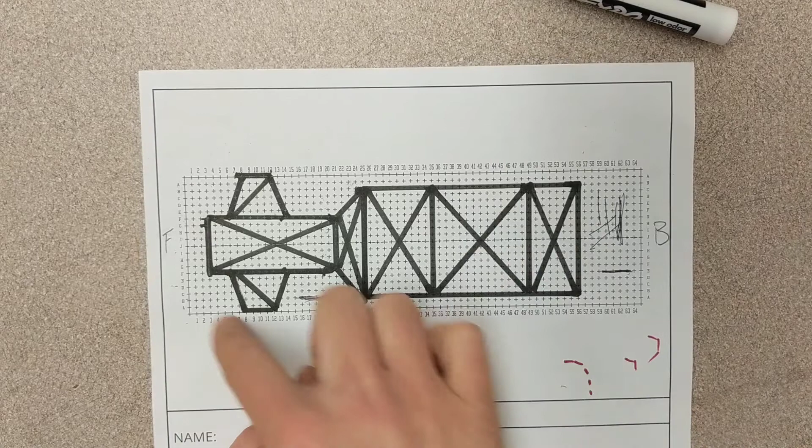What this is going to do, if you look at one I did last period, is give us a nice rough draft that we can then put into the computer so that when we laser cut it—here's one we just did on the laser cutter—you can see this is basically exactly what I had planned on my rough draft, and it's going to give us a really nice strong base for our car.

So we are building the main structural component of our vehicle. Now, before we do anything else, you need to go on the internet and do a little research on your Chromebooks about what type of car you want to build.

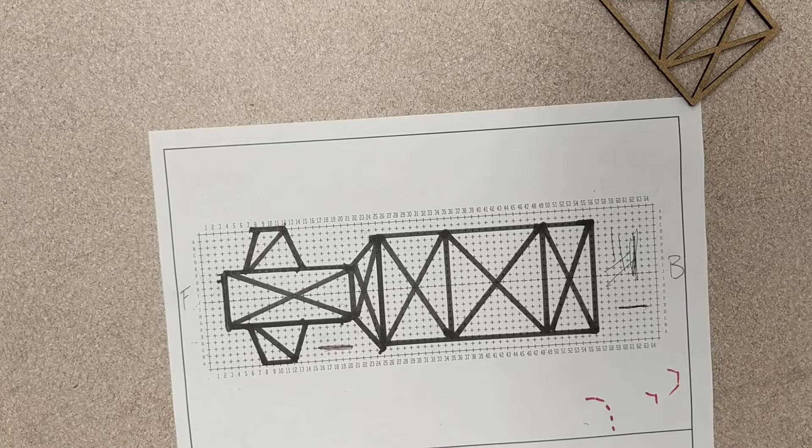It's really totally up to you, but I printed out some sample drawings so you can see the difference. Does anybody know what kind of car this is? A VW Bug, right? And here's a Scion FRS—I'm actually going to do this car because I think it's cool, and I drive it in real life. So I'm going to see if I can make a mini dragster of this car.

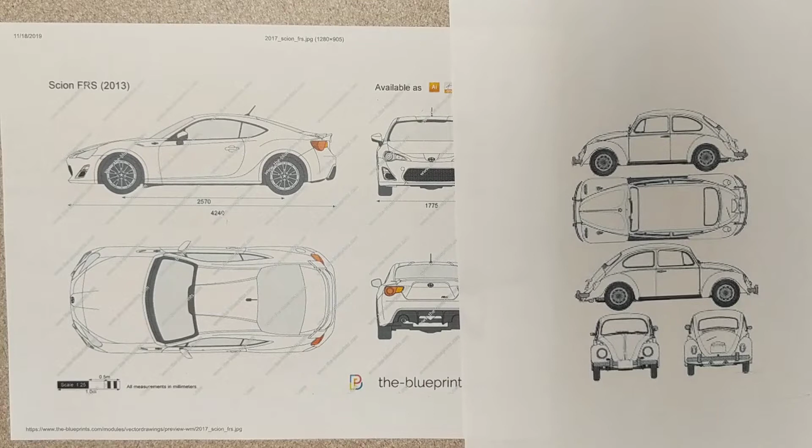But you'll see both of these cars have different shapes, right? They're both shaped differently, so the shape of your car is going to determine your chassis. On this one I might have the front angled in a little more like this, then bring it back, and angle the back in, because the chassis should fit entirely under the car.

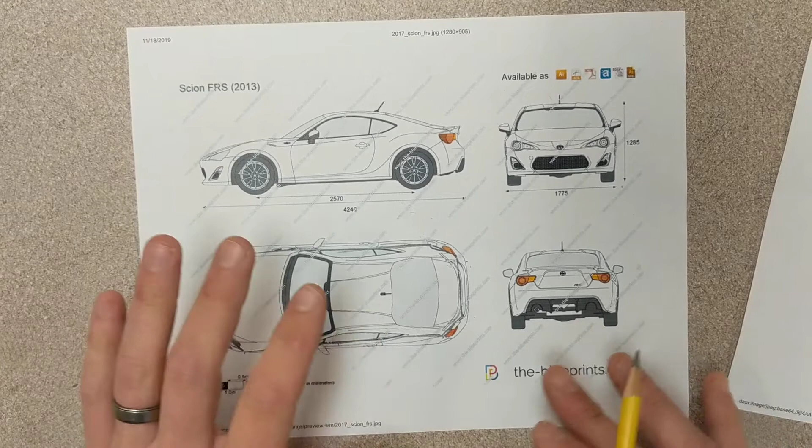On this one, I might draw my chassis out like this, then bring it over, and maybe even put a little bump out here for the front. But that's all going to have an effect on your final car. So if you design your chassis with the wrong proportions or the wrong size, it'd be really hard to make the body fit on that chassis, because they're not the same proportions, they're not the same size.

So you need to do some research and think about what type of car you want to build. Now, on our design sheet, we are going to get this design sheet.

If you look at this sheet, there are numbers across the top and numbers across the bottom. It goes from A to I this way, A to I from the bottom, and then there's a solid line right down the middle. We are going to design on this and basically play connect the dots to make our chassis.

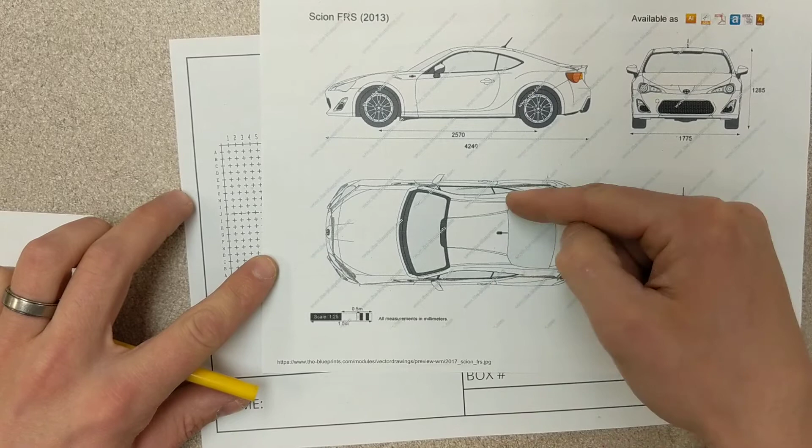Now, this line down the middle—if you remember back to bridges, how we wanted our bridges to be symmetrical—on a car, the passenger side and the driver's side are symmetrical too. So we want our car to be symmetrical this way, and we can use this whole sheet to make our car symmetrical.

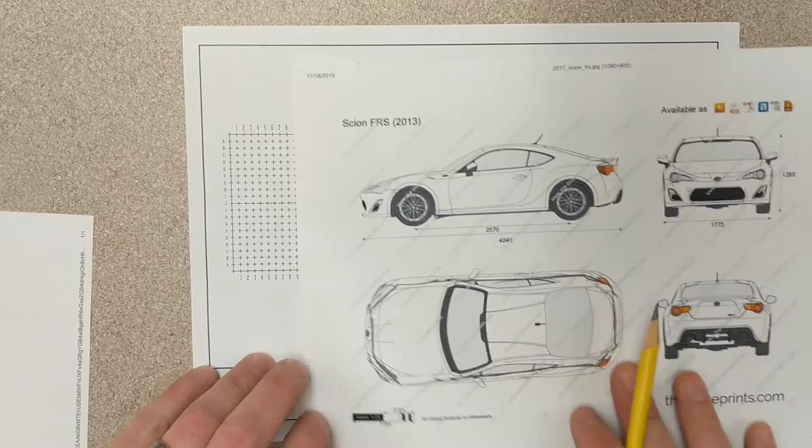So what I'm going to do is keep this off to the side, and maybe even cut it out so I can keep it on camera here. I am going to start by just doing the outside border of my chassis. I'll start just with that.

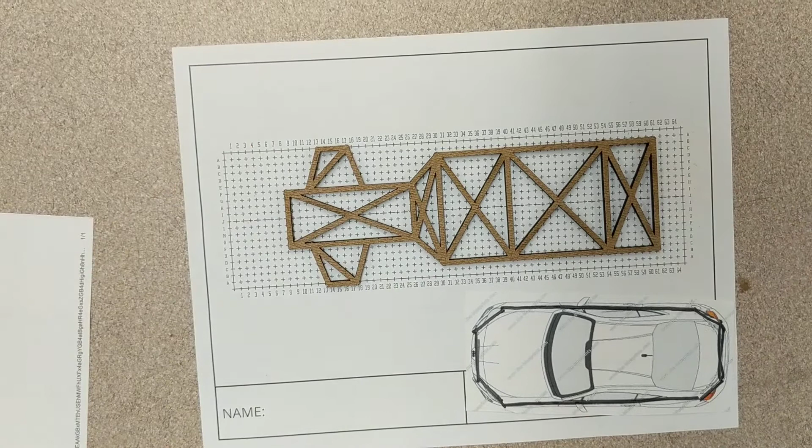Now, this size is the maximum size your chassis can be—that is the maximum. It can be smaller than that, it can be any shape, it doesn't have to be a rectangle. It could be triangular, a skinny rectangle, a long rectangle, or a short and fat rectangle—that's totally up to you, and it's going to depend on what kind of car you pick. But it has to be symmetrical, and it has to stay inside of that boundary.

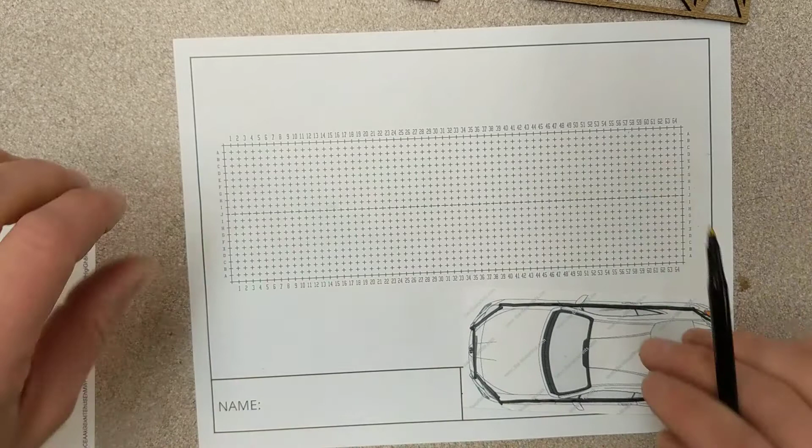So I'm just going to start, and you're going to do this part in pencil. I'm just going to start by drawing this front support right here. This is going to be the front of my car, and this is the back of my car. I'm going to draw using a ruler.

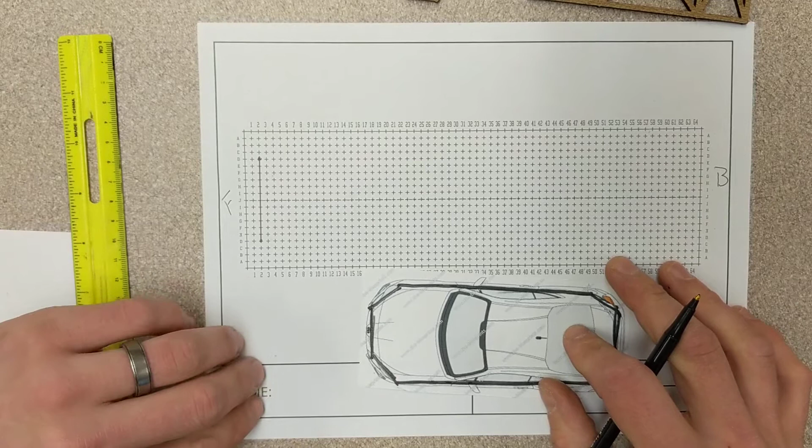I think I'm going to start on 2D, and go to 2D on this side, and then just draw in this line with a pencil—I'm just playing connect the dots. Then we have this angle that comes back, so I think I'm going to angle it back to about here, because I don't want it to be the full width—I'm going to make it a little skinnier.

So I'm going to do this, right? So now that was 4A, so then I can go down here to 4A and make a dot there.

And we're making this thing, see how that's keeping everything perfectly symmetrical? So then this is actually just kind of a straight line back. So now I'm going to kind of try to figure out about how long I want my car to be. I'm going to go to maybe like about here to 41.

So A41, and I'm going to connect this like this, and then I'm going to come down to the bottom, A41. I'm going to connect this like this. All right, so now we kind of have that shape.

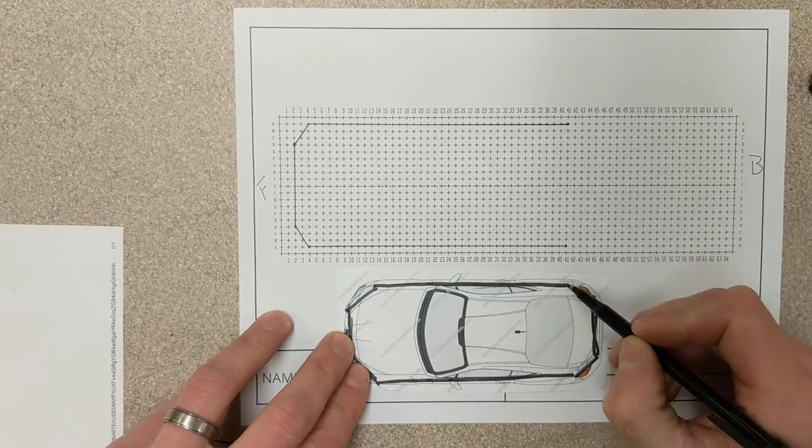I like that. And then I'm going to do an angle back like this so that I could squeeze this under my back bumper. Because when I start rounding my body off and shaping my foam body, you don't want the chassis sticking out underneath it. When you look at a real car, you don't see the chassis sticking out of the real car, right? Or on our truck, when you look at our truck, you don't see the chassis sticking out. It's all underneath. So I'm going to make this go back like this, and that is D44. Then I'm going to go to D, which is this line here, 44.

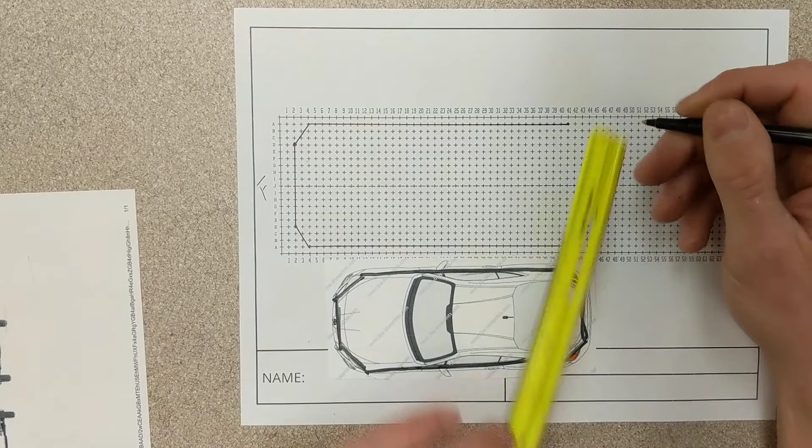It's okay. It's not great. I think this line should be kind of back a little more like that. But we're going to go with it and see what happens. We'll just rock and roll with it and see how it goes.

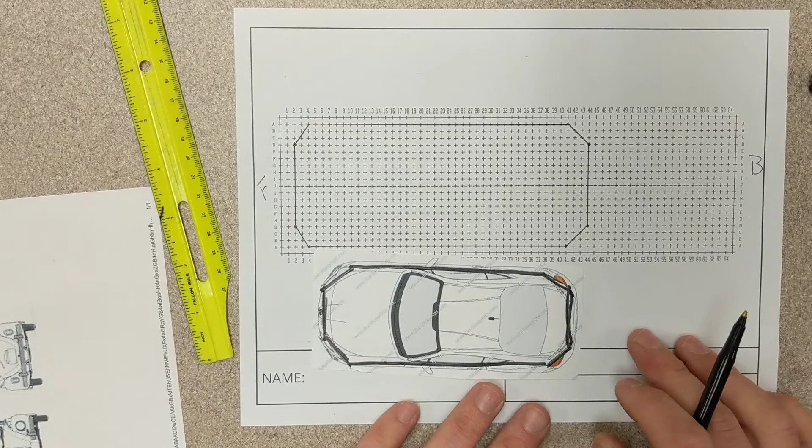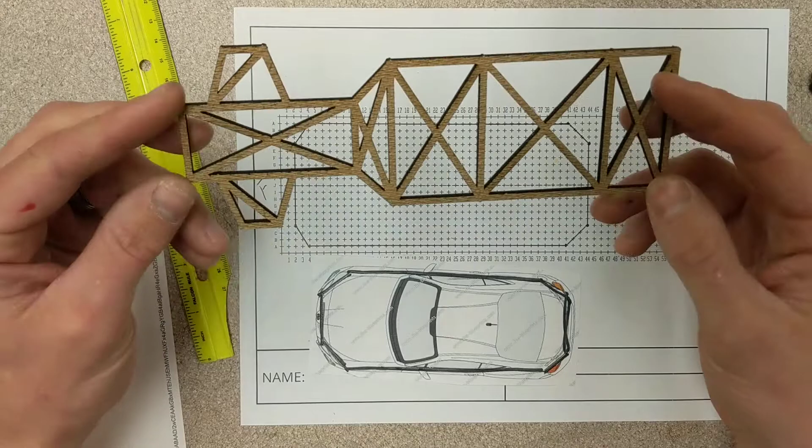Now, if I just cut out a rectangle like that, that's not going to be a very strong chassis. If you look at this chassis, there's all kinds of supports in it. If I just had the outside rectangle, that thing's going to twist and bend, and it's not going to be strong at all. So we'll go back, and then we'll just add in some supports.

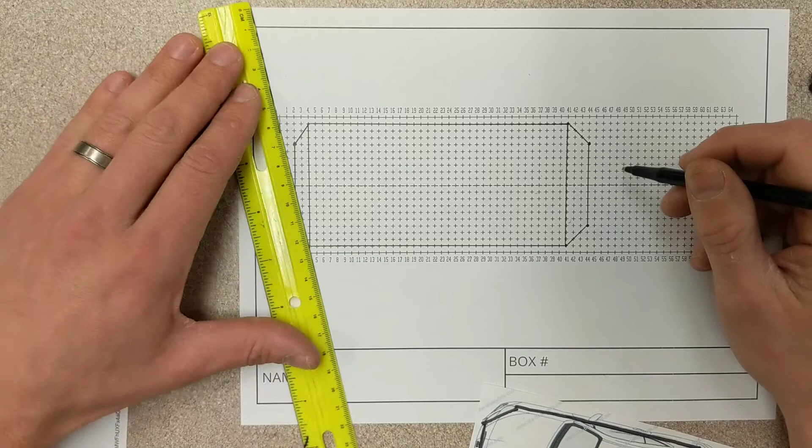So maybe I'll support this back bumper section. And the front bumper section. And if you remember back to bridges, quadrilaterals are weak shapes. We want to make triangles as many times as we can.

So I had a quadrilateral. I can split that up into that one quadrilateral, split into 3 triangles, so that's going to be a lot stronger. And you notice I put the center right on this line of symmetry. I'm going to do the same thing back here.

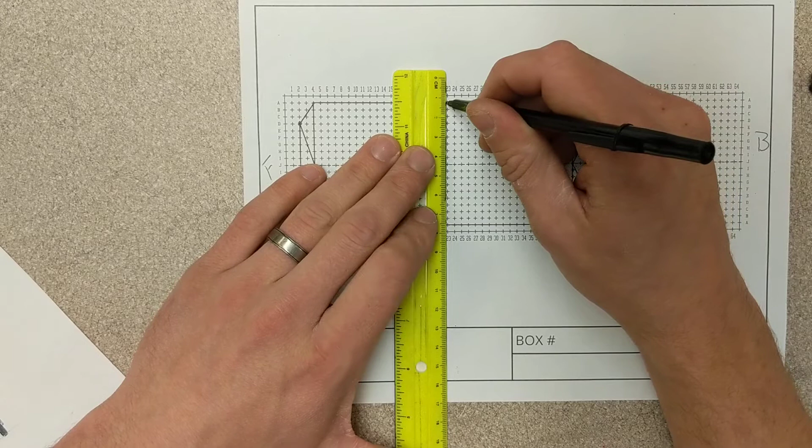All right, that looks good. And I'm just going to go simple. I'm going to go kind of near the middle, and I'm just going to draw 2 X's like this.

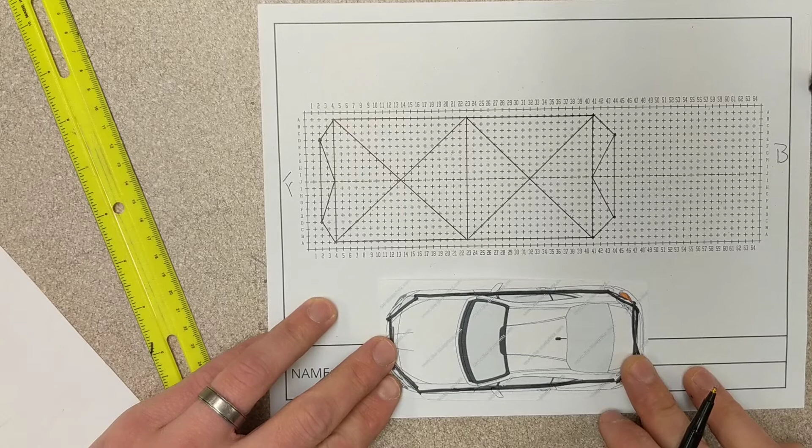All right, and I think that is the shape I'm going to go with for my chassis. Now, the last thing you're going to do is once you are happy with your shape in pencil, because obviously the pencil line is much thinner than the actual line of the wood, right?

Once you're happy with your shape in pencil, we are going to give you a marker, and you're going to go back over it in a black marker, and it's important that it's black, all right? It's very important that it's black because we're going to mark some other things on here with some different colors.

So you're just going to go back over it, and it's just going to make the lines a little bit thicker and give you a better idea of how your chassis is going to look when we actually cut it out. So you can see this Sharpie line. This slightly worn Sharpie gives you a little fatter line.

And you can see that gives us a more accurate idea. So if you do this, let's say I do this, and I look at it, and I'm like, oh man, that is like a lot of room, a lot of space between some of those supports.

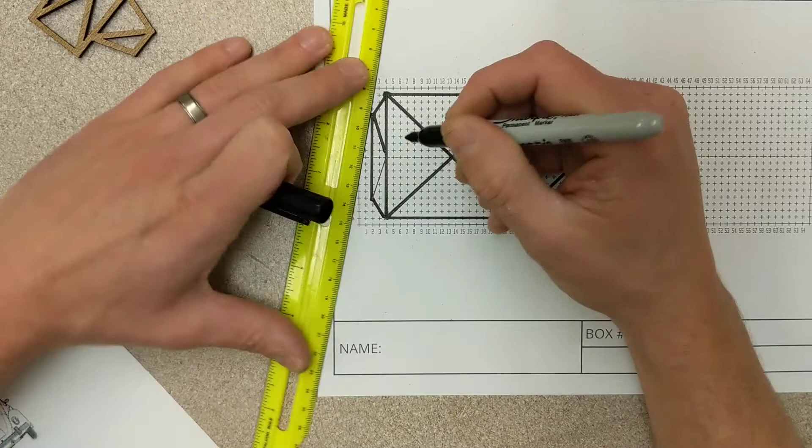Okay, at this step, before we start designing it on the computer and cutting it out, once you do this, maybe you'll see an area and you'll go, man, I really want to put some extra support in there. Okay, like there's a lot of room in there that's not supported. So maybe at that point, you go back and you go, oh, okay, I want to...

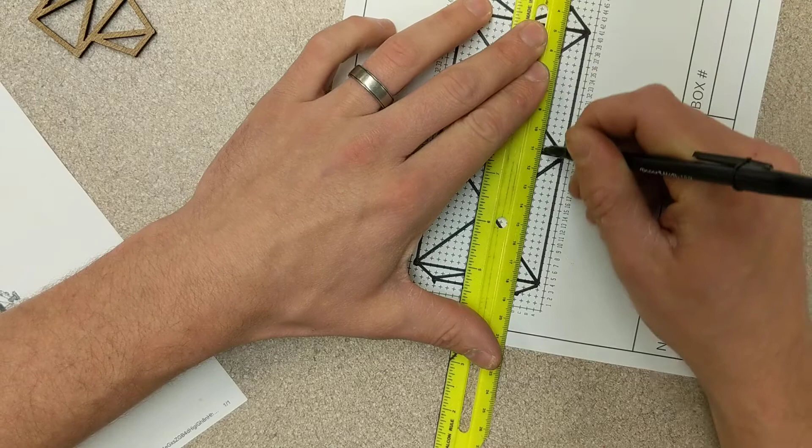put a support in like this, and then that is on D, so go up here to D. I want to put a support in like that, and then maybe just make this whole thing a little more rigid, make it a little more sturdy. Okay, that's the point of doing a rough draft, so that you can go back and change it around before you move through in the process.

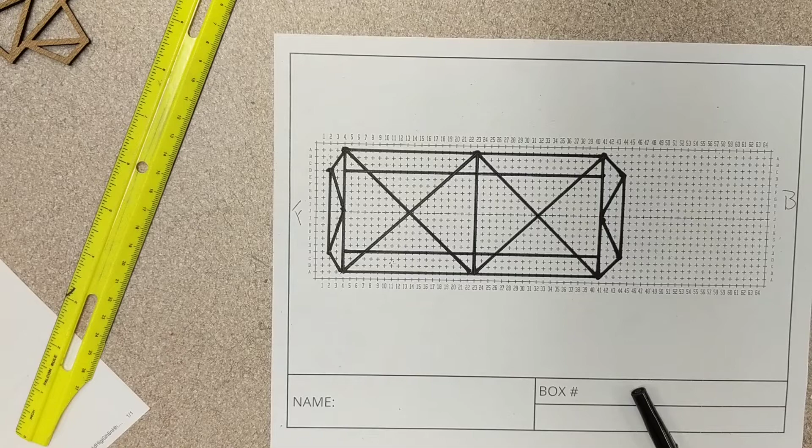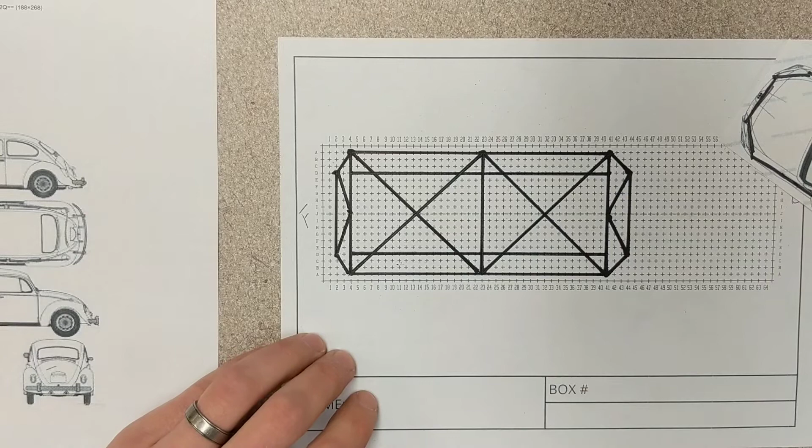All right, so step 1, find some kind of generic car, or it could be a very specific car shape you want to do. Step 2, figure out the border shape for your chassis. Step 3, add your supports in. And in the very last step, you're going to go over it with a black marker so that you get those thicker lines, so you get a better idea of what it's going to look like when we actually cut it out. All right?